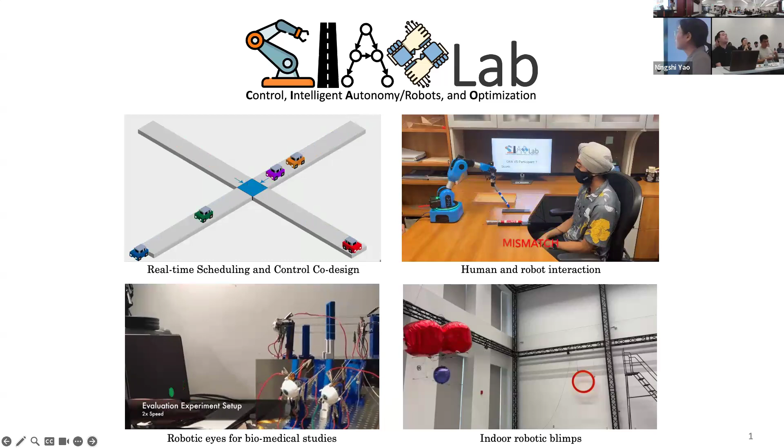We use control theory and dynamic systems to study how humans and robots interact with each other. For this specific scenario, we're trying to study how human and robot mutually adapt to each other. Using control theory, we want to study under what conditions we will have a limit cycle. So I try to adapt, you also try to adapt, and we cannot converge. So that's another interest.

And this bottom left is a very exciting project. We recently got an NIH grant, which will allow us to build an artificial muscle-driven robotic eye to help us study human ocular motion and strabismus, a specific cross-eye disease that's affecting more than 10 million Americans. Actually, it's a big number.

And last but not least is today's show. I'm going to focus on the indoor robotic blimps, how we design and deploy them, and also design the corresponding control to achieve autonomy. This is my student's blimp in our lab, trying to capture and score autonomously. It scored out of multiple failures; I picked the one that's successful. Okay, it's a joke. We actually succeed a lot of times.

To give you a quick introduction about airships: airships or blimps started outdoors. This picture shows the 1930s, when they launched the first outdoor airship that achieved a cross-Atlantic mission, flying across the Atlantic Ocean. But in the end they abandoned this as air transportation because they used hydrogen at that time, and it eventually blew up and caused a tragic accident. Later, helium was found as a much safer lighter-than-air gas. So now blimps use helium as the lifting gas.

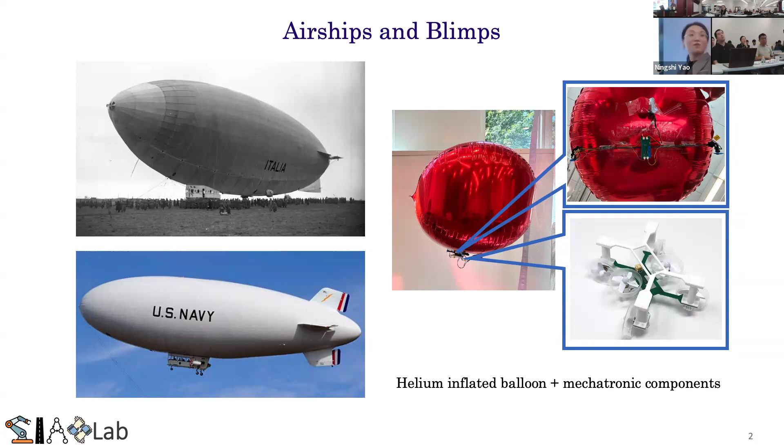And also you can be creative. You can design your own gondola, which is a mechatronic part attached beneath it. You can have different design. And then generally, if we have a helium inflated balloon plus some mechatronic component, we can actually easily make a blimp. All right, so then you may ask why we need a blimp, especially miniature indoor blimp, right? So I will actually try to sell this idea very quickly.

So the benefit of using indoor robotic blimp is, first of all, it's small in its size. And the major benefit it gives us compared to multi-copter drones or the fixed wing airplane is that because helium provides the main lift, you don't need to waste the battery power to just fly, right? So all the power is used to move the blimp around. So for one blimp, if you use a decent size of battery, we can achieve up to 3 hours flight time per battery charge, right?

But if you use indoor drones, maybe 15 to 20 minutes, the bigger outdoor drones up to 1 hour, that's the maximum, right? So that's definitely the first benefit, if we think about indoor tasks that need long duration. For example, I do human robot interaction experiments. So if I need to collect continuous human data, the blimp is actually an ideal platform. Without any interruption, I can collect the human data.

Another obvious advantage is that it's more friendly to humans, right? So I will show you this video. So imagine a drone doing this to you, right? Even if it's small, even if it's protected, I won't allow them to do this to me. But yeah, it's hilarious. When we shot this video, the girl actually enjoyed it.

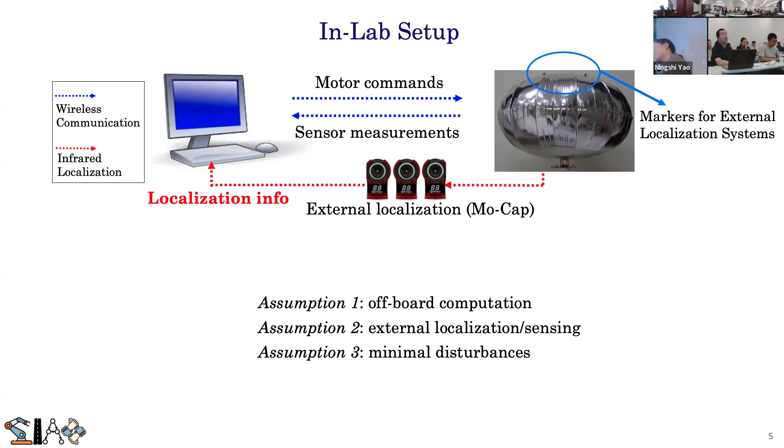But if we do this indoors, then we can fully use the blimp dynamics and try to design a good controller. This slide shows the general 6 degree of freedom dynamics, and this is the dynamic equation. Position and pose plus their corresponding velocities give 12 state variables. And roughly speaking, these two equations are able to model the full dynamics of the blimp, right? So it's very powerful. It's able to describe what the blimp does.

But actually in reality, if we want to use those equations, the challenge is that we need to identify all the parameters, which is very hard to do. Another problem is that the blimp will also have this external disturbance, which I denote as capital F and capital M. Because of the environment, sometimes capital F and capital M, the external force and moment, will be the dominant force, which makes the control very hard to do.

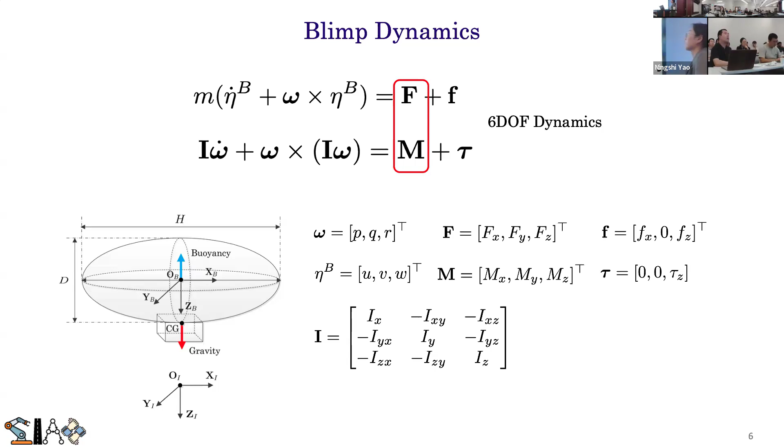So to make the design of the controller easier, the first step we do is use three motion primitives. Because of how we designed the gondola, the blimp is constrained to only have these three motions: forward and backward, up and down, and also changing the heading direction.

Given those motion primitives, we assume those motions are decoupled, which is not true. We will see this in the next slide; they are actually coupled. For example, forward and yaw are definitely coupled together. But if we assume they are decoupled, then the nonlinear full dynamics can be simplified to just second order dynamics, and they are separated. Because this is second order, if for now we ignore the external force, we can easily use a PID controller to stabilize the system and control it to a reference.

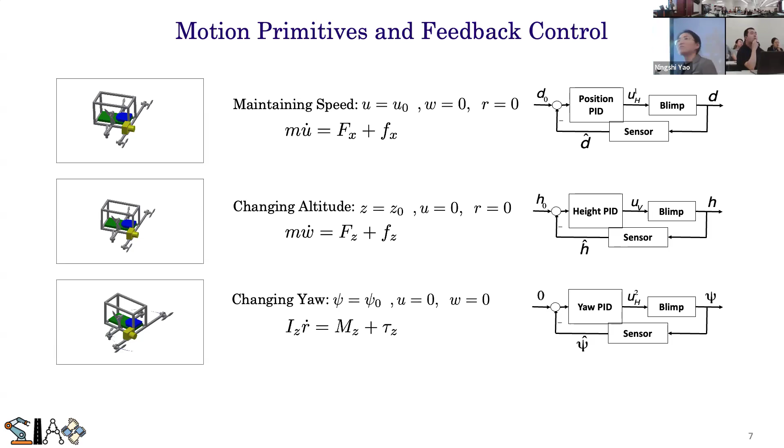Okay, so this is now our simplified linear model. Easy enough, because then it's just mass, which can be directly measured. Then we can go ahead and do the system identification. I'm showing 3 transfer functions. The first transfer function shows the forward backward motion. It was supposed to be second order, but after we get the output response to a step input, we can only identify this as fourth order. That's because of the coupling of this motion with other motion.

The second one is the changing of altitude, so up and down. We can see we actually have 2 different dynamics. This is because the efficiency of moving up and moving down are different, because you have a big chunk of envelope blocking the airflow. So flying down is harder than flying up, because the wind jet is blocked mainly by the envelope. We deal with this by separating this into 2 different transfer functions.

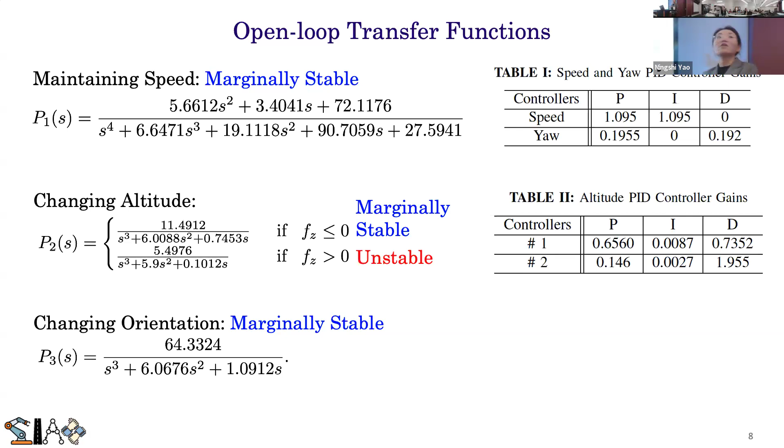The last one is changing the heading angle. Based on these identified transfer functions, they are either marginally stable or unstable, so we need a controller to stabilize them. As a very trivial first step, we just grab each transfer function and design the PID controller correspondingly. So let's see how it works.

The first one is we test the altitude controller in the lab. We have a reference height, and it's able to quickly converge to that. And if you add a big disturbance, it can also come back to the reference height. So that means the height controller sort of works. Sorry, I fast forwarded this. Let me show you the yaw controller.

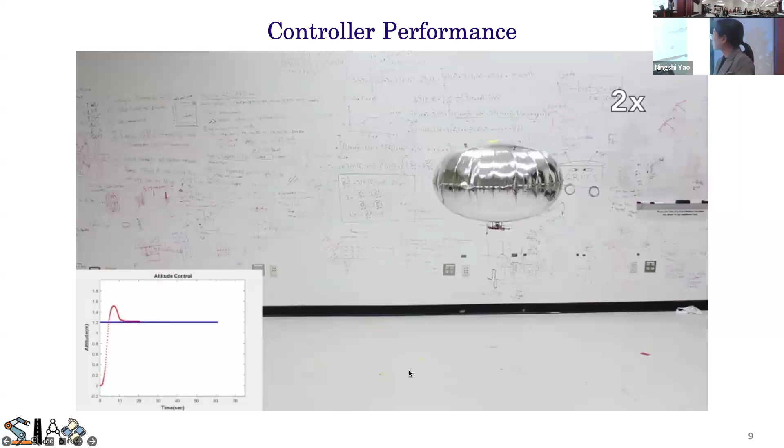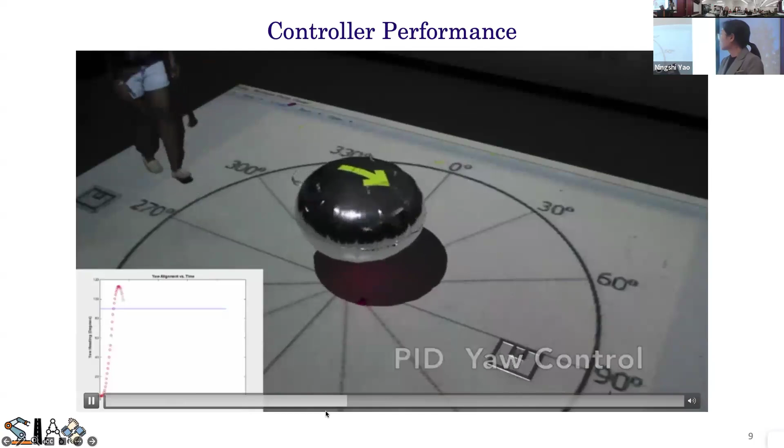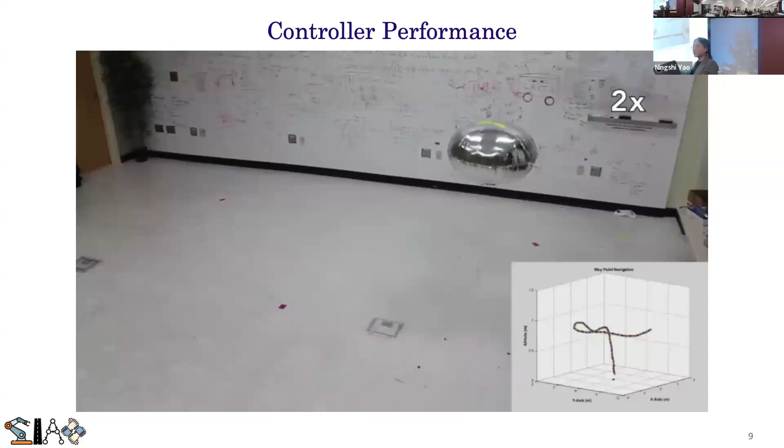This is controlling the heading angle. The blimp was supposed to look at 90°, which is projected here, and it can converge to this 90° reference. Combining the altitude, forward, and yaw controllers together, we can achieve a waypoint controller. We assign a bunch of waypoints, the 4 corners of this space, and the blimp can follow this trajectory, visit the 4 corners and loop around. So this is the basic functionality.

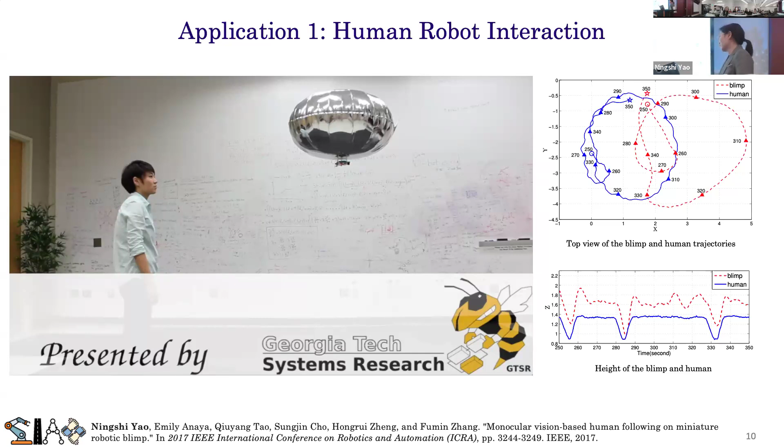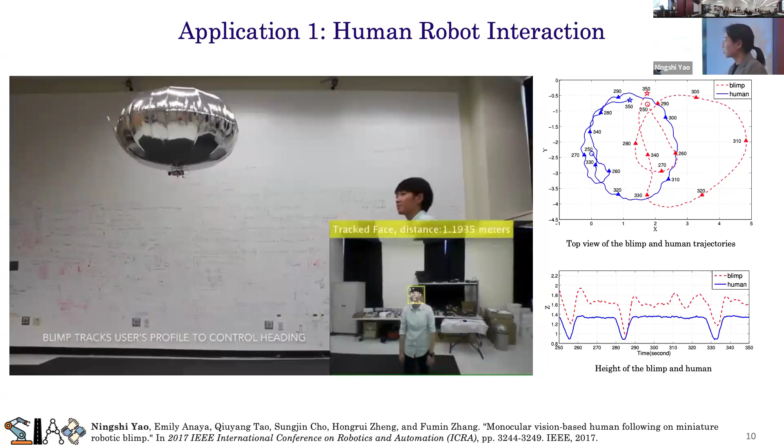With this, we can already start our first application. This is truly my work, from a long time ago when I still had short hair. We used this identified model and the PID controller to do a quick human robot interaction demonstration, which is used in our demo today. It tries to identify a human face, and as I walk around, it tries to lock the detected face at the center of the image frame. So if I walk around, it will try to follow me using the yaw controller.

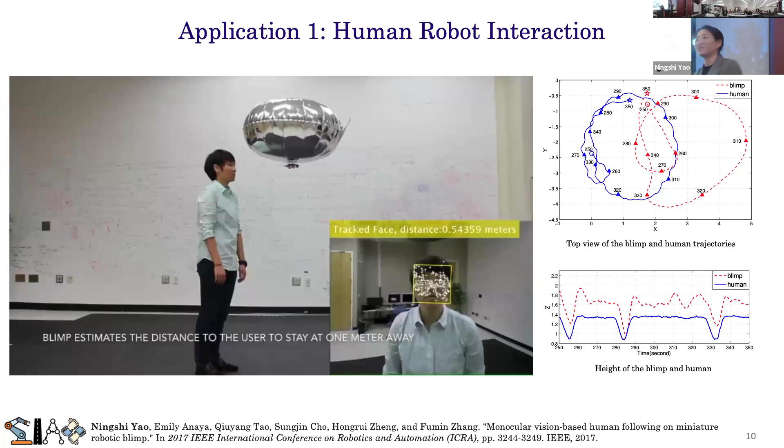And if I kneel down, so I'm about to kneel down, it's able to adjust the height. But if I stand up, it will actually stand up. If I suddenly step too close to it, it will try to maintain a polite distance from the human, right? And those are the collected data from our object track system, just to use this as a ground truth, right? And then build on top of that, I want more like a bi-directional interaction.

So what we do is instead of just detecting face, we also created 2 motions, like a hand gesture, which is horizontal motion, just wave your hand horizontally or vertically, right? And it's enabled by just an SSD, which is a deep neural network to do object detection. And then Blimp is able to recognize it. If we wave this horizontally, it's going to spin.

And also we put a small LED light to say, oh, I got your point, right? So I'm about to do the corresponding action. So then we use this to actually collect the human data to study whether there's a bi-directional feedback, so having this small LED will help with the interaction or not. So this is some experiment we did. Okay, so simple and efficient, right?

So the PID controller. But then if I want more precise control, here is a problem. If you watch this video, you probably caught it when we were doing the demo previously, so we can rewatch this again. If he starts, you see this big pitch oscillation, right? That's because at the beginning, I'm trying to move from the static stage to suddenly needing to fly fast. So this is actually because we put everything heavy beneath, right?

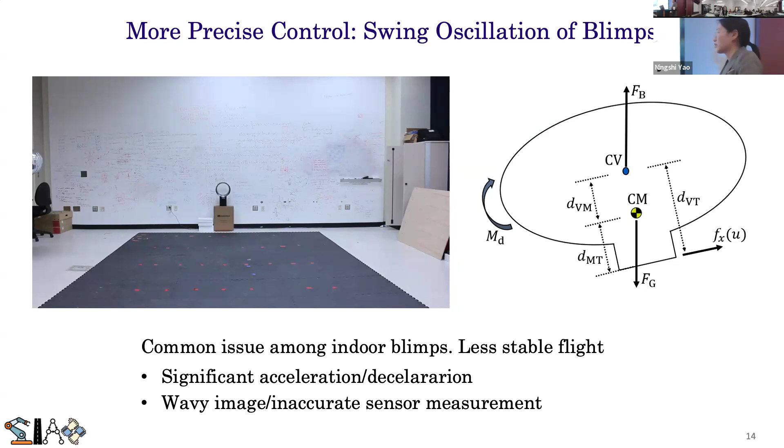And also this pitch oscillation can also be caused by the wavy image. So sometimes the image measurement is kind of noisy, so that it actually messes up the measurement, or sometimes it's directly incorrect measurement. So it will cause this swing oscillation, right? So then we also want to design a controller to see whether we can reduce this swing oscillation, because this makes the flight less stable.

Okay, so this is a lot of equations. So I will quickly explain it. So what we do is we try to look into the state space model, just modeling this 1D swing oscillation, pitch oscillation, but it's still coupled with the translational oscillation. So it actually depends on how fast you are trying to fly forward, right? Which makes sense. So then in this first equation, the blue variable is denoting the speed, the translational speed.

Okay, and then the strategy we use to solve this problem is the inner and outer loop control strategy, which is also a very standard way of doing control, right? Because the pitching is a faster dynamics, and speed is a slower dynamics, we try to use the inner loop to damp down the pitching, while the outer loop tries to make it constant speed.

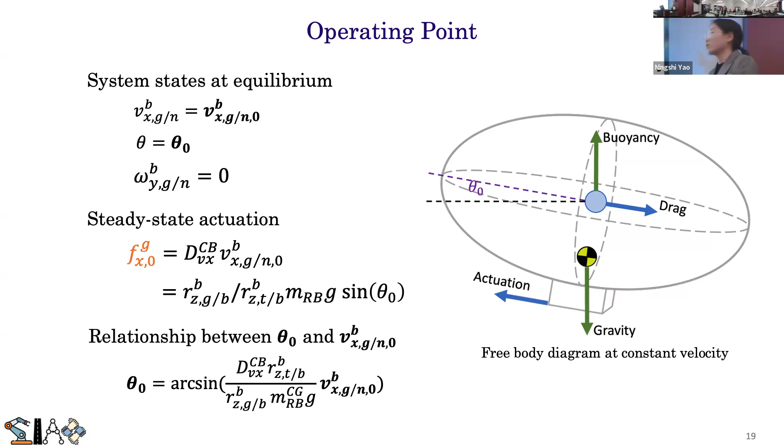So then corresponding to each constant velocity, there is a constant force equilibrium, there is another constant pitch angle, right? So then this is the inner and outer loop structure. The inner loop controller will assume we have a constant speed, and then try to design a controller. So we do actually a feedforward path by using this equation to compute what is the corresponding force corresponding to this reference pitch angle, and then feed this to the plant, right? Then we also add a feedback path to compensate any disturbance, right?

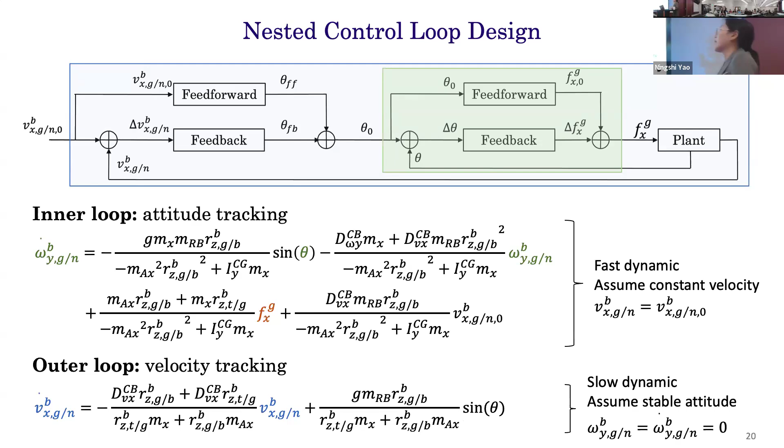So then this inner loop will make sure, if I have a reference or operation pitch angle, it's able to take care of that. So you can fly stably, maintain this pitch angle. And then the outer loop is going to make sure we have a constant forward speed, because each forward speed will correspond to one pitch angle. Okay, and this is the structure we use. And then we can see how the result will be.

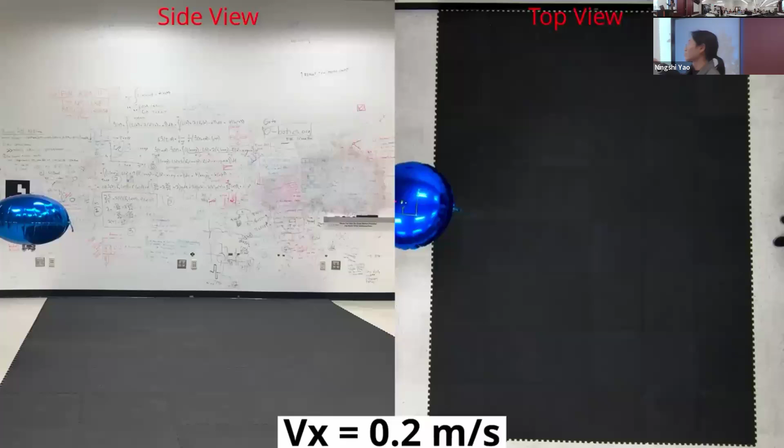So now it's actually more stable, and wait and see. This is my colleague Qiuyang. He actually tried to introduce a disturbance, and then you can quickly damp the oscillation, right? And also it's very constant flight, right? So it's slow, but just steady. Okay.

So an application of this is that now we can use the blimp to mimic an underwater vehicle, right? Because it has similar dynamics, it can be easily blown away by wind, the same way the ocean current can blow away an underwater robot, right? So we use this as an experimental emulation platform to allow us to test the algorithm before we actually launch an underwater vehicle in the ocean, right? Because if your software does not work, that's a waste of time and effort.

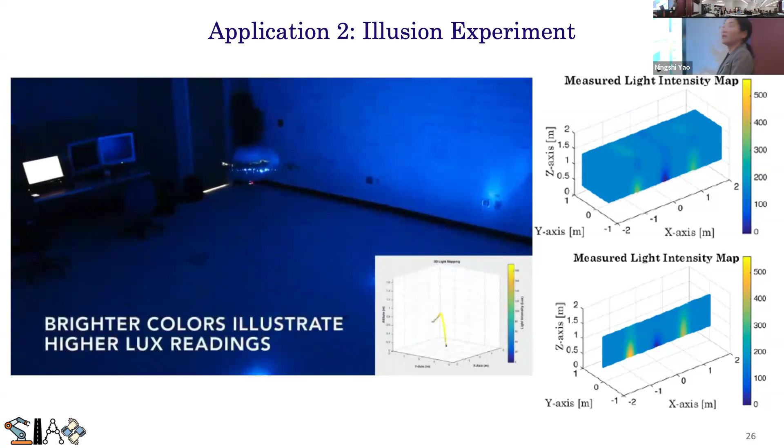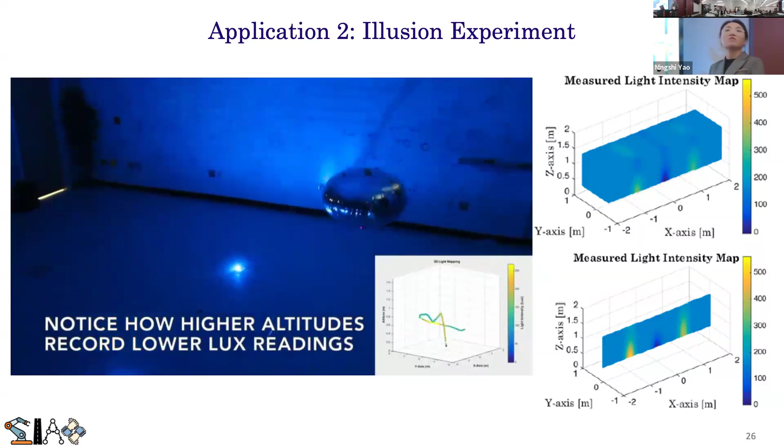So this video is showing our lab at Georgia Tech, where we can put the light in, create a light field, and then we put the light sensor on the blimp. So we can collect the intensity of the light at each point, right? And the algorithm my colleague was testing at that time uses those sparse measurements of light. He used one specific method called the kriging algorithm that allows him to reconstruct the whole light field, right? So you can see this is the center of the light, which matches the location of the light we put here.

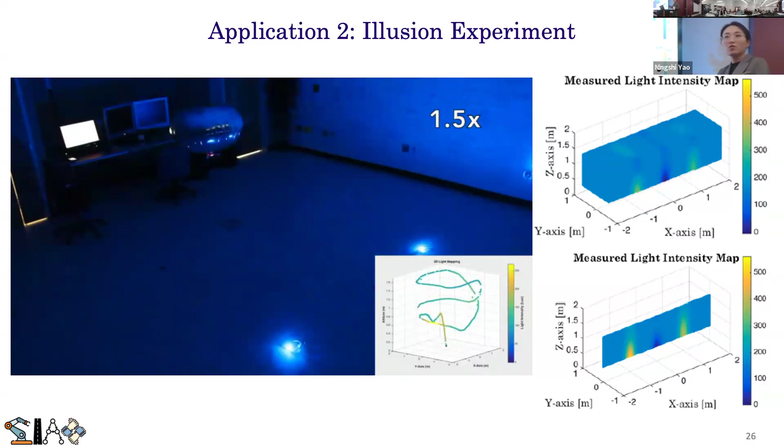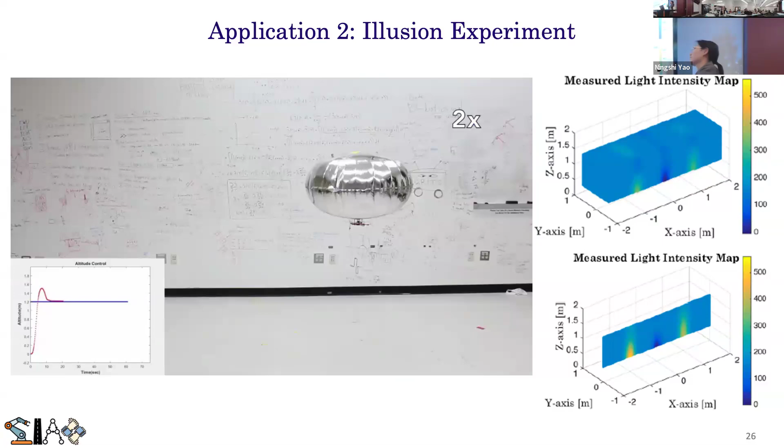And this is the reconstructed light field, right? So you can think about this as an underwater vehicle going into the ocean, taking measurements of maybe pollution or chemical leaking, and then we're trying to remap what the field looks like. Okay, so far I introduced the in-lab application, right? So the next part is, what if we want to move it out of the lab?

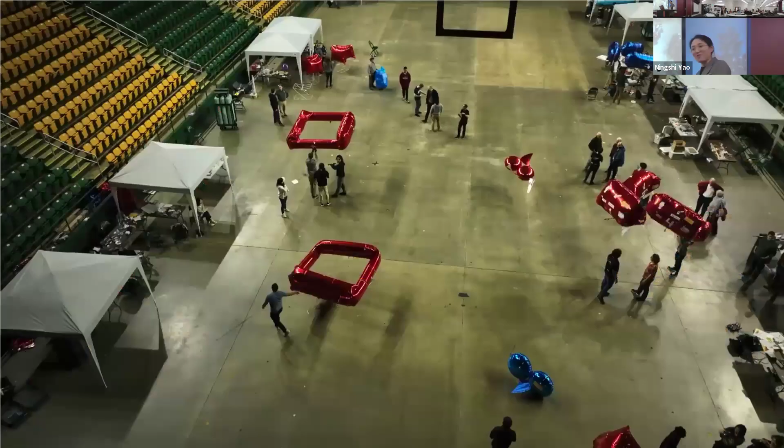Okay, and this video is showing a blimp competition. I sped this up a lot, right? So this is out of lab in an adversarial scenario, and everything needs to be on board. This is played at GMU, and you also see the flappy here, right? So this competition George Mason has been running for more than 6 years, and I have joined this competition for more than 3 years. It's called the Defend the Republic blimp competition.

So you can think about this as a 3D version of air soccer, or a robotic version of Quidditch, right? We have 3 goals on one side, 3 goals on the other side, blue team versus red team, right? And those colorful green and purple balls are just like the soccer ball. The blimps need to autonomously capture them and also score them, right? The competition is played by a lot of universities, right? So all those are the list.

So the rule of the competition is each game is 60 minutes. It's kind of long. That's like 60 minutes, so 30 minutes each half. During the halftime we need to swap sides, so then it's fair. So you attack this side for the first half, then the next half you attack this side. And also you defend your side, exactly like soccer, right?

So then for every 5 minutes, only the first 30 seconds allow manual control. And also only one blimp can be controlled. All the others still need to be running autonomously. And then the rest of the 4 and a half minutes, it needs to be fully autonomous, right? People just leave the field, hands off the controller, just let the blimp play.

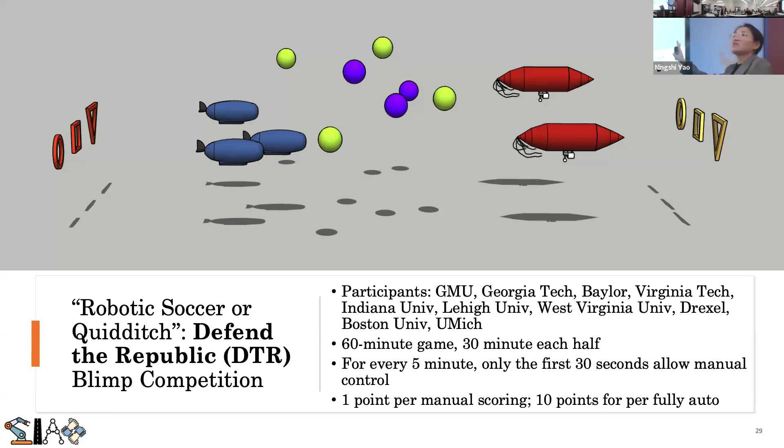And then we also try to encourage the fully autonomous mode. So how we win the competition is 1 point per manual score, 10 points for fully autonomous, right? So fully autonomous is actually weighted a lot more. Okay, and then this competition is sponsored by the Office of Naval Research.

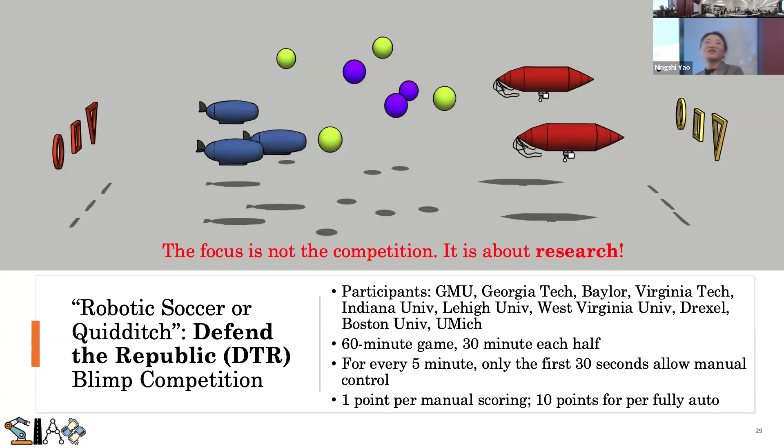And I just want to emphasize, this whole thing is not about competition. It's about research, right? We're just using this platform as our annual review meeting. We want to actually test our development in the real field, instead of just having fun in a competition. It's not that fun. It's very stressful. But this is about research.

So what research question are we trying to address? It's actually exactly relaxing all the assumptions I had previously. Because it's out in the field, the requirement is no off-board computation. Everything needs to be on board. And also definitely no external localization, right? No mocap system. It's in our basketball arena. And also there are going to be wind gusts and the opponent team's defense actions, bumping, adversaries, right? So how are we able to do that?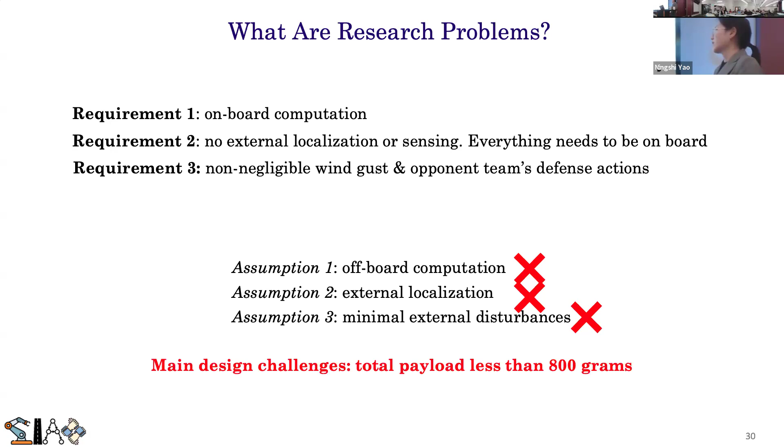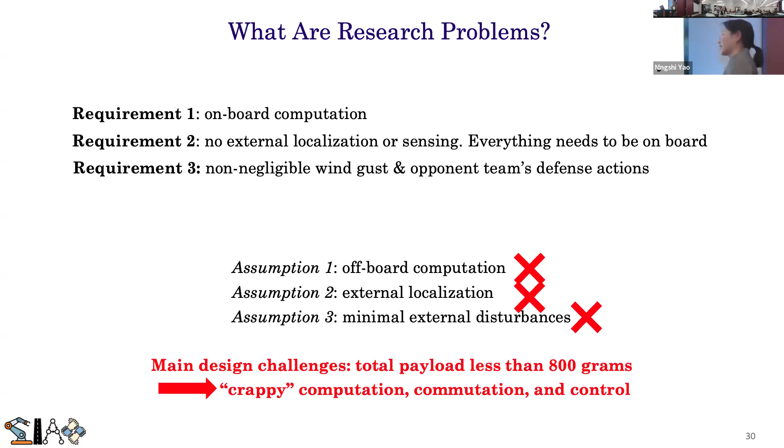And also we have again a design constraint, which is the total payload. Everything on board needs to be less than 800 grams, which is kind of challenging if you consider the battery, everything. So this means crappy computation, crappy communication, and maybe crappy control, right? You cannot have perfect anything. You have crappy everything, because you eventually want it to fly.

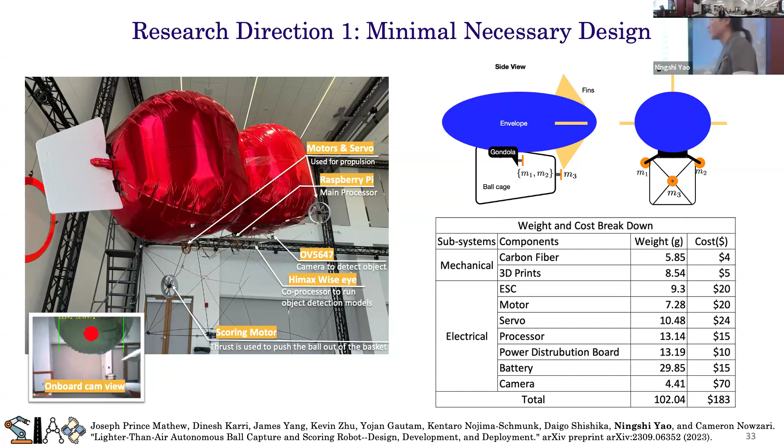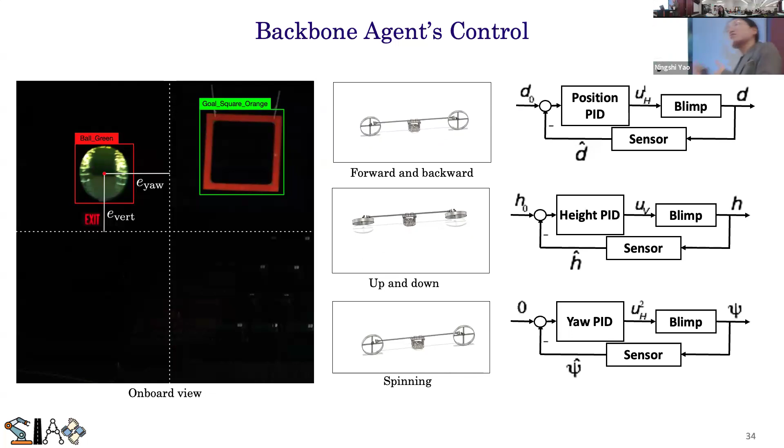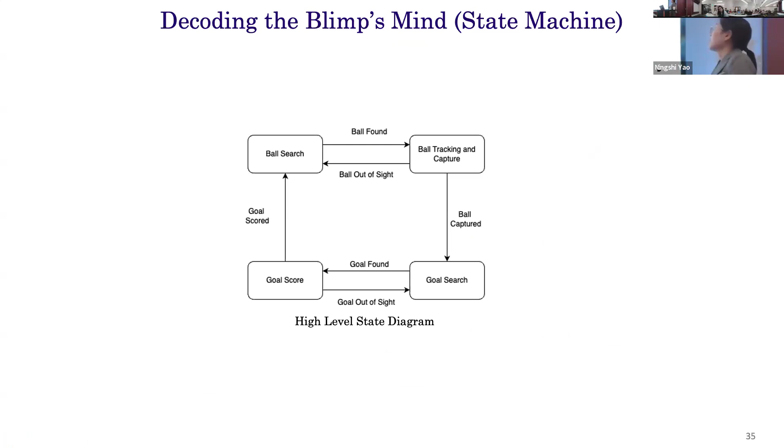And then also the software is minimal but necessary, right? So we have 4 stages. The first stage at the beginning, if I don't see anything, I'm just going to do ball searching, because the first step is you need to capture a ball, right? The ball searching, and then if I detect the ball. And also the challenge is that there's no direct localization. So during searching our solution is that we use the goal as a reference, right? And also we put a barometer on board, which is very light and cheap, to measure the altitude.

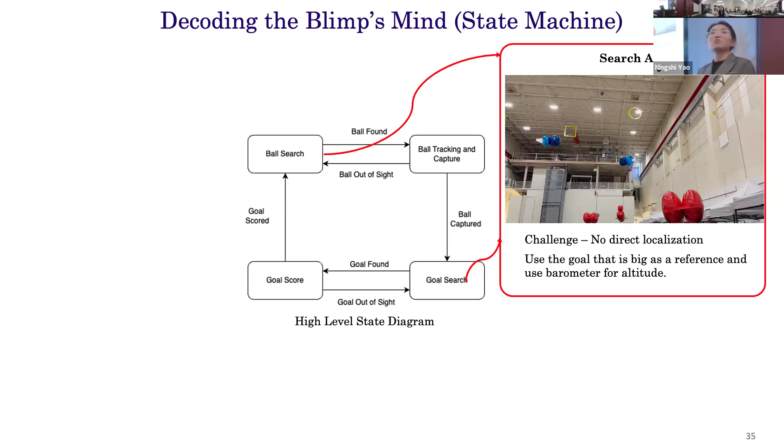Okay, and then if we get the ball, we capture the ball, move forward, and then if we capture a ball, try to search for the goal and then score, right? So this is a very simple, but also efficient state machine logic.

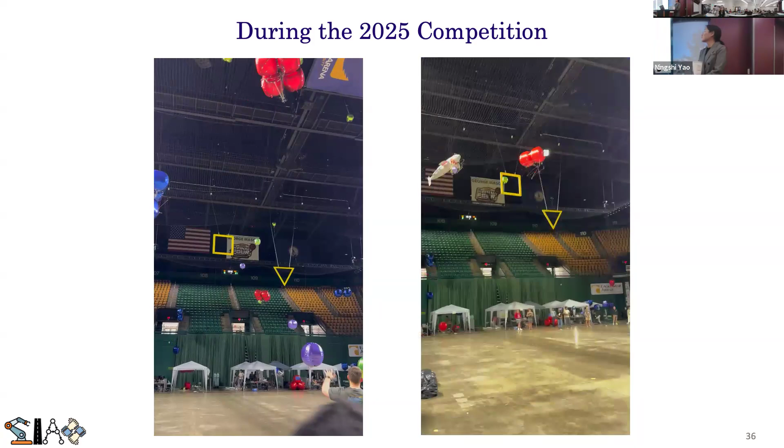Okay, so then let's see how we do. You can hear me yelling in the background because I want to show you the excitement, right? So this guy is trying to score now, fully autonomously. Yeah, we got 1 in. And then another one is actually we need to swap color. So that's another constraint we have on the competition. So one day you play blue team, one day you play red team, right? So then we need to make sure our design is also modular.

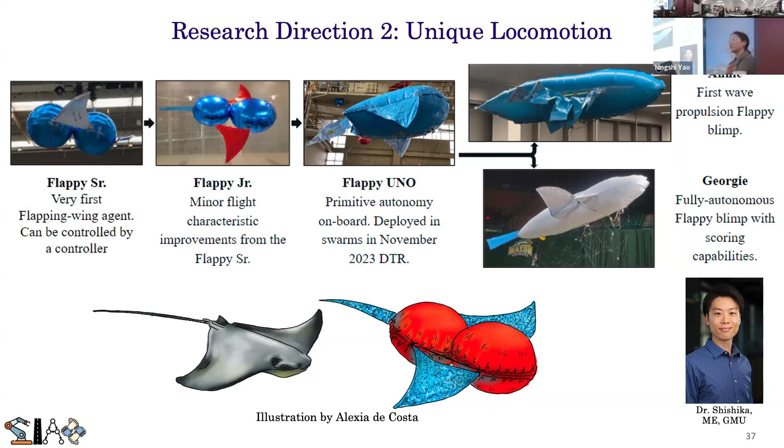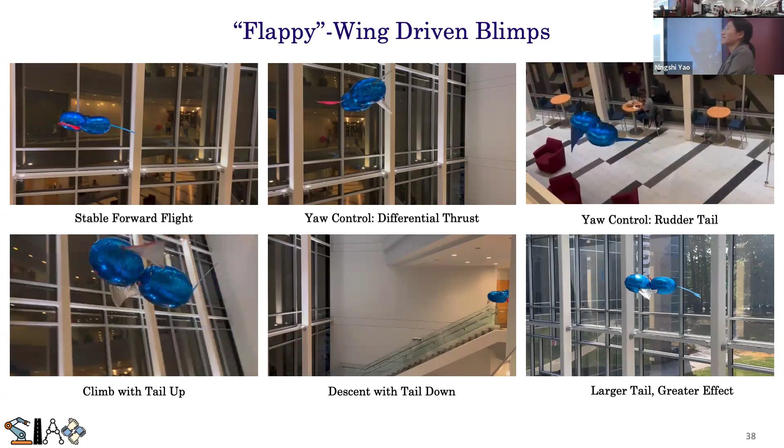Okay. So then again, a little bit more detail about the flappy agent you see. So it has two wings, right? So this is the only actuation that allows you to fly forward. But the good thing about blimps is that they can glide, right? So it has this nice, elegant streaming behavior, so you can glide. And also, if we want to control yaw, you just have one side flapping, right? The other side stops, and this is how we are able to fly. And then also, if we want to have a sharper turn, we can use the tail rudder to help us turn. All right, and then climbing up, yes, we can also use the same tail, but pitch up, right? So this will also allow us to pitch up and also pitch down.

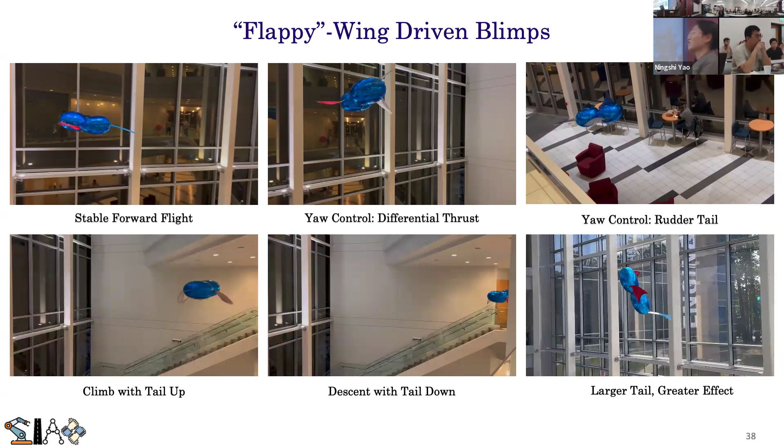The last thing I want to show is very cool. So if we have a bigger tail, actually we're able to do this trick. So you fly in a circle because the pitch angle is much sharper, right? So then we can do this. So this is cool.

Yeah. And also a little bit of a nice scientific result we find: we try to compare, so what's the difference between flapping wing and the propeller, right? So we find out the flapping wing is much more energy efficient. It's because the flap will allow you to glide for a long time, right? So the test we did is that we actually use a load cell, which is able to measure the thrust. And then to test the duration, we compare different shapes of wings and also the combinations, and compare this with different propeller to motor combinations.

So the test is that we use exactly the same battery, fully charged. We just let it fly as long as possible. So then we find out that the Flappy result is here, meaning that Flappy can only fly slower, right? So maximum speed is here, about 1 meter per second. Propeller can achieve much faster motion, but then the trade-off is actually it has less duration, right? So Flappy can actually outperform all the propellers duration-wise, right?

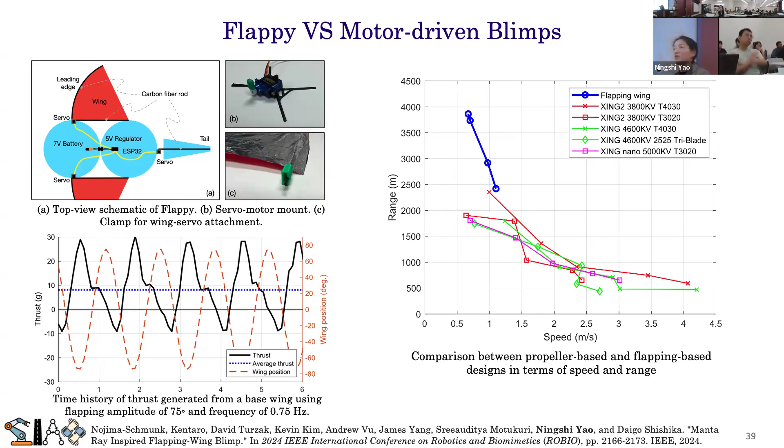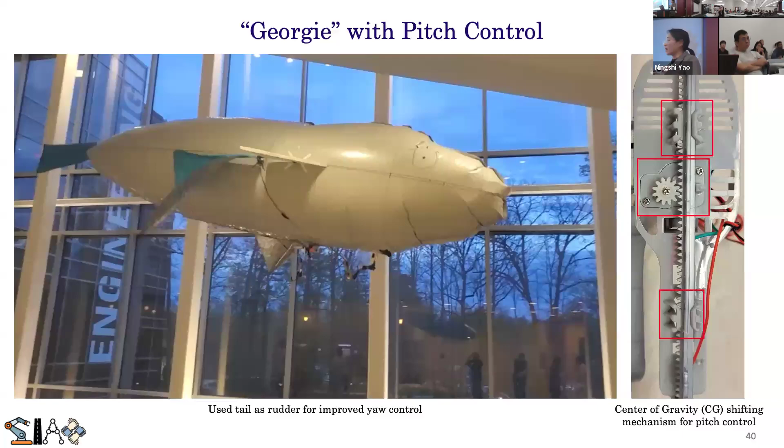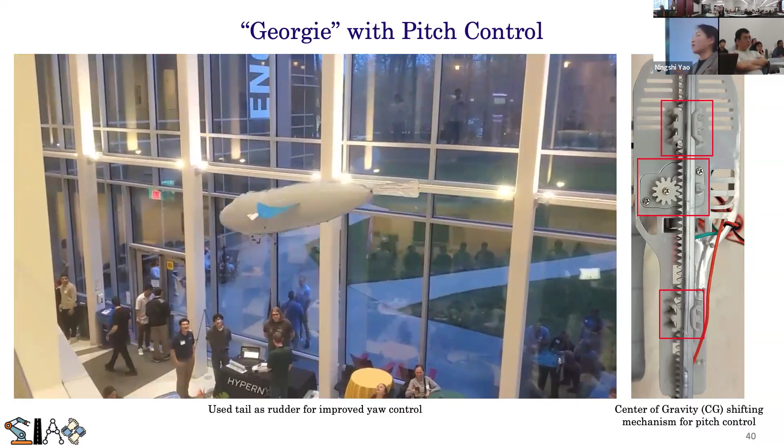So this is one of the nice benefits, and also the design and this result is in one of our conference papers published last year, right? And then later, Flappy is just for showcase, for demo. Later, we finally find out how we are able to achieve full autonomy for our agent, which is called Georgie. So Georgie is bigger. This envelope is customized by our own student because we want to have a bigger volume to carry a little bit more. Meanwhile, we still want to make it aerodynamically efficient. So our student actually handmade this whole envelope.

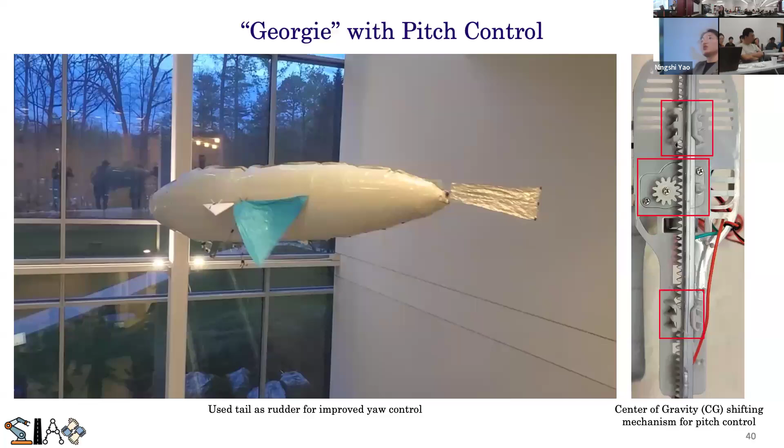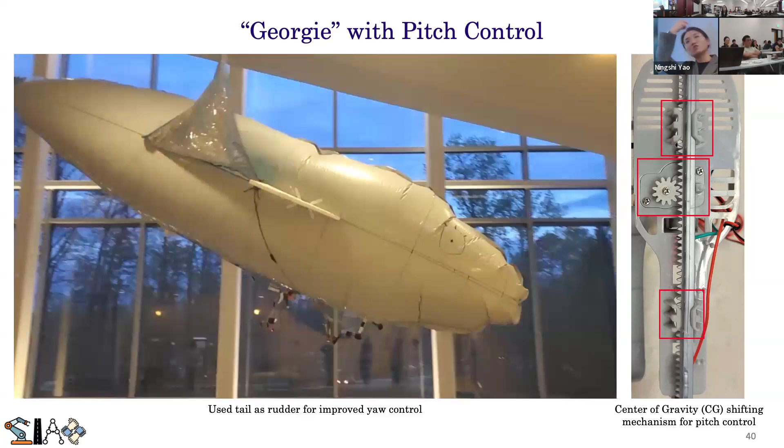So the trick Georgie can do is, because now it's big, only having the tail won't be enough to change the pitch angle. So what we do is at the belly, beneath it, we actually put a very long rail and then use this gear system to move the CG, so move the heaviest part, which is a battery, from the head to the tail, right? So by moving the battery around, this is how we are able to change the CG. So this is very forward, so then the blimp is able to pitch down. And if we move it to the tail, it's able to pitch up, right? And also using what we have on board, because I don't want to introduce any more weight or any more actuation. So this is kind of a smart design we do.

Okay, and then this video is so cool. It's because this is the only penalty shooting round we ever have in our blimp competition. It's because some other team violated some rules against Georgie. So then Georgie has 5 minutes by itself, and then tries to score as much as it can, fully autonomously. Okay, so then let's see one round. So when we shoot the video, it's already captured 2 balls autonomously, and then we can see it glides through.

Let's go. And this is the yelling by my colleague, Dr. Daigo Shishika, because, yeah.

And during that round, we scored 3 fully autonomous goals. So we got 30 points out of the penalty shooting round. Yeah, so that's good enough, right? And this is actually a joint work between 2 ME students and also my student Youjang. So I really like this because this truly shows a joint team effort. Youjang helped a lot with the autonomy and also software design. Meanwhile, the 2 ME students worked a lot on the mechanical design.

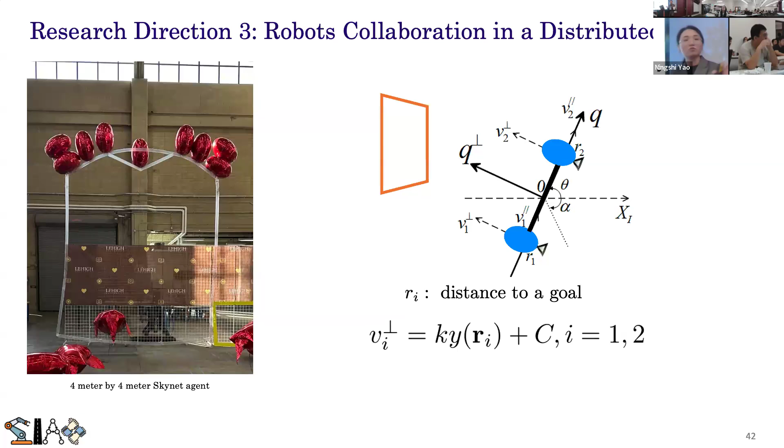So if my measurement is small, the forward speed is just proportional to your current measurement, okay? So what we do is, if my target is a goal and I'm closer, then I will slow down. If it's further away, I will speed up to try to catch up. So eventually I'm able to converge to the target.

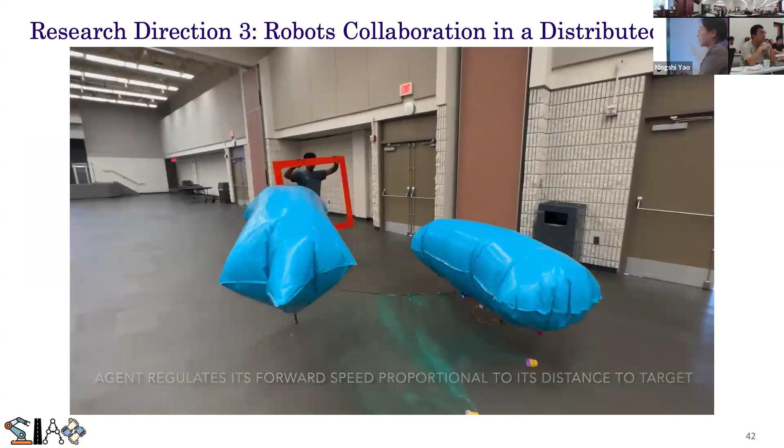So then let's just see how it will work out. These two backbone agents, our main scoring agents, are trying to estimate distance based on the camera measurement, right? So if it's bigger, I'm closer, so I slow down proportionally. If I'm further away, I try to catch up faster. So you can see the tracking behavior works very well.

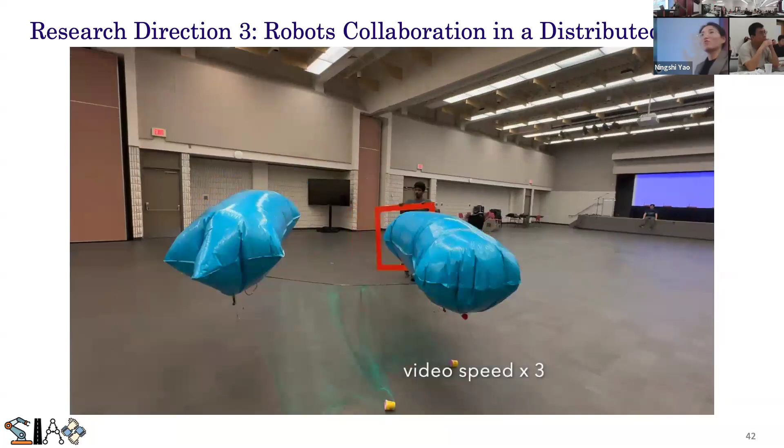They don't communicate. Even though we put a rod in here, we just want to carry a net, right? I will tell you what the net is going to be used for. So they just try to regulate this forward speed and follow, tracking really nicely.

Okay, and how we are going to use this in the competition is, like I said, I put this rod and also the net beneath. So if I don't see any opponent agent, it will just try to fly forward. Once it sees a target, I can use what I just showed, the tracking, to autonomously and collaboratively approach the goal.

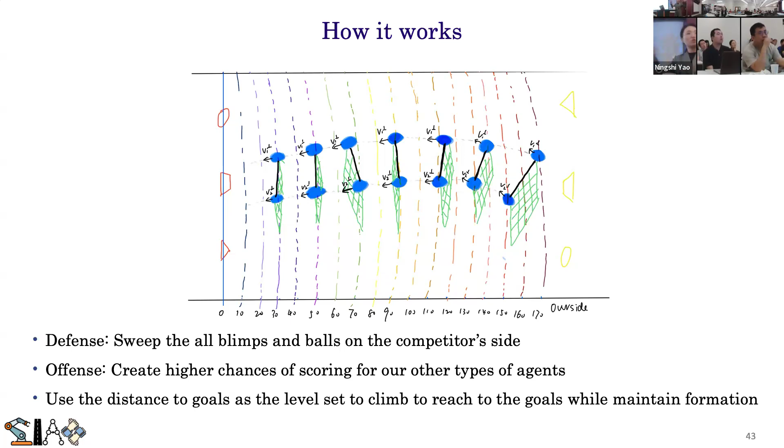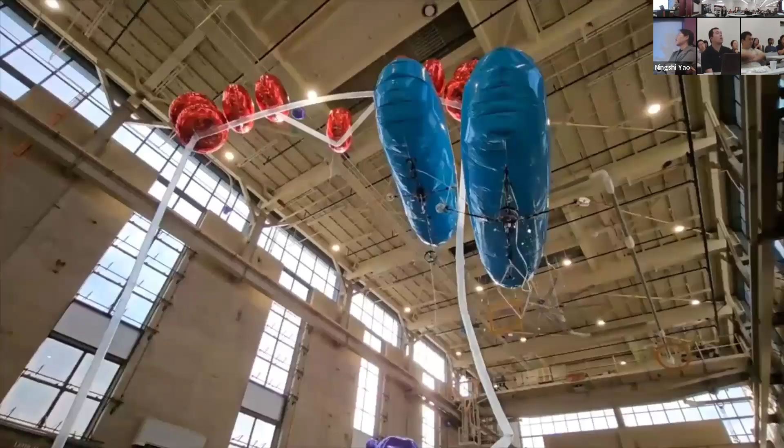All right, and for the sake of time, all the theory is analyzed, right? So it's guaranteed to converge as a source seeking algorithm. Due to the sake of time, I will skip this.

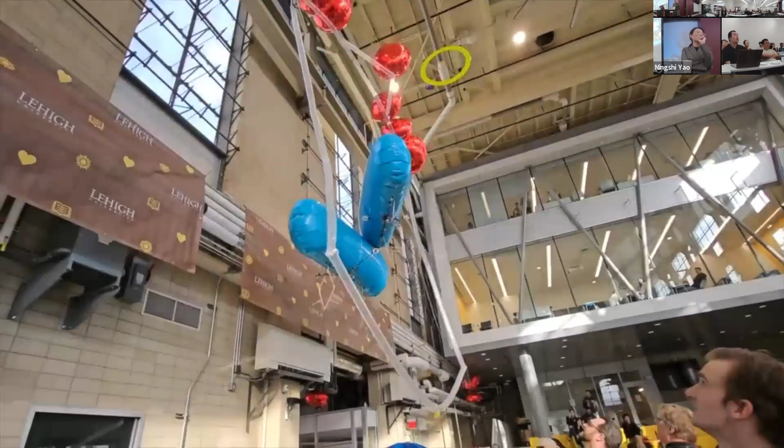And this is our successful defense. So we are the red team. The blue team is our opponent, right? Using this strategy, we take the target to be the blue agent, the color of the opponent, and they are able to capture both of them and smash them on the wall. And we leave them there for one autonomous mode, so 5 minutes. We are nice friends, so we let them down.

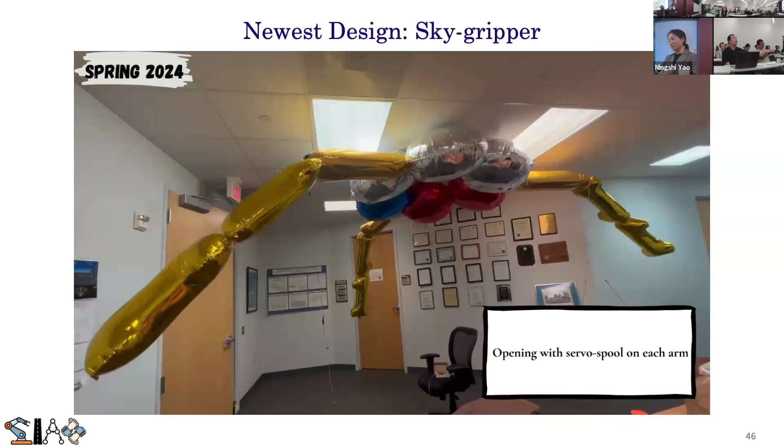Okay, and then just to show you something else, why just use a vertical net, right? I can also use a gripper. This is work done by my senior design team. I gave them this result: I don't want this sweeping behavior, I want a giant gripper, right? So they were able to come up with this.

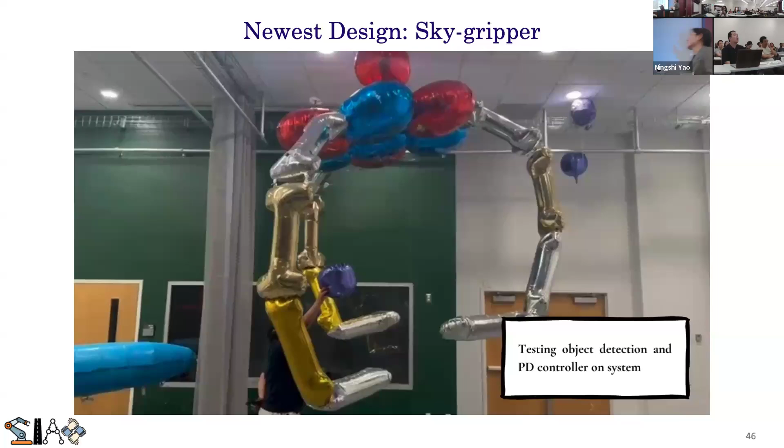The legs of the gripper are actually just pulled by string. If they release the string, the fingers naturally get forced down by gravity, right? Again, we try to follow the philosophy of minimal but necessary. So using gravity, you can force down. And they use a PD controller. They put a down-looking camera here, to seek the opponent agent again. If they see an opponent agent, they will try to fly down and grab it, right?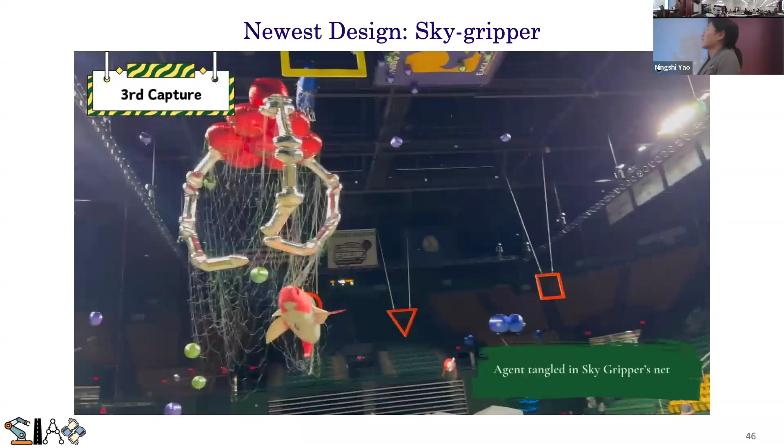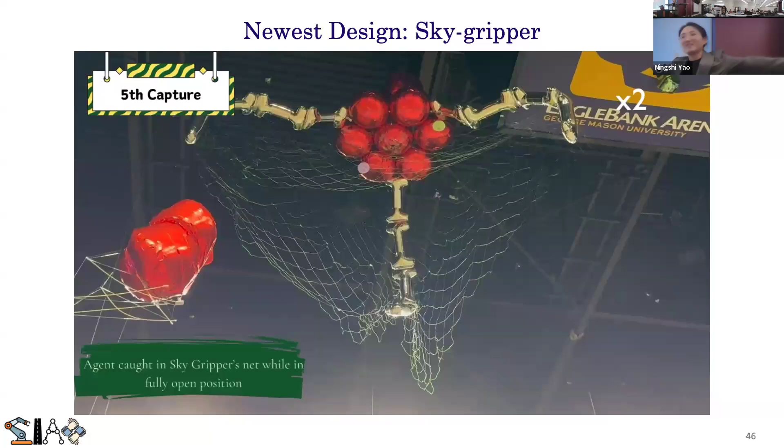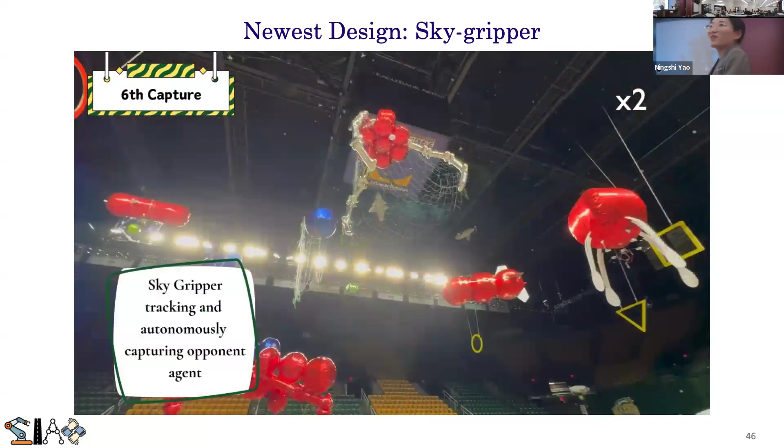Sometimes it backfired on us and captured our flappy. But we do have some successful defense during the competition, right? The flappy is very big, so you can capture it. And I think one of the agents actually flew down. We also put two baits, a purple LED light and a green LED light, just to trick other agents to fly in thinking this is a goal. Yeah, so it's able to capture this blue guy, grab it and keep it there, right? So this is fun.

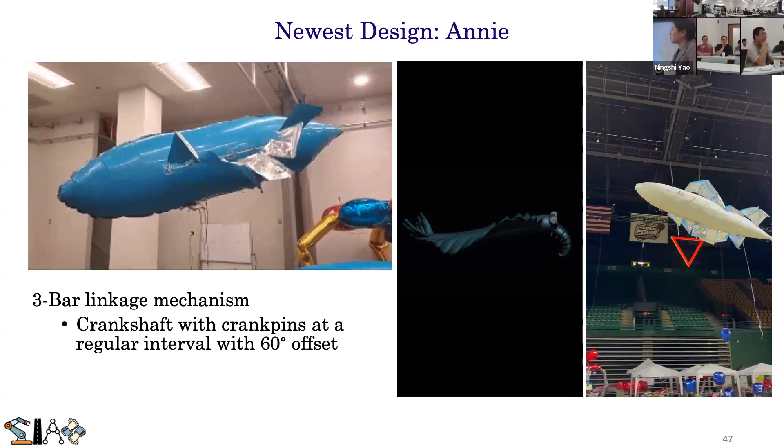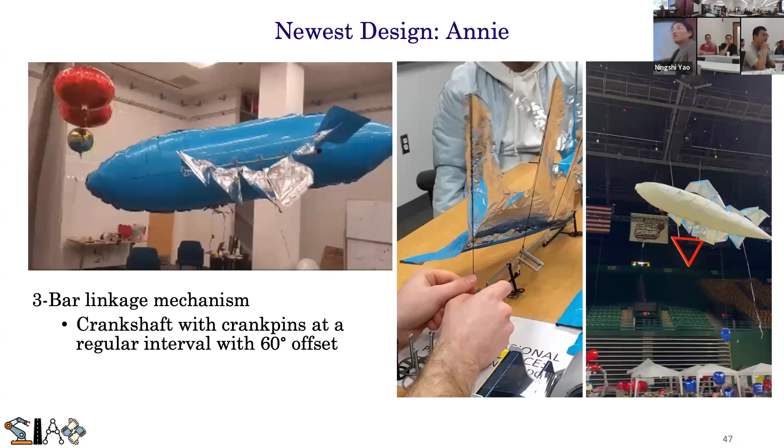So the last fun project, which is also a senior design, right? We want to extend the flappy using a linkage mechanism. Our ME team designed a phase difference of 60 degrees between each linkage. So by using just one motor, it's able to generate this wavy behavior, right? And we call this Annie.

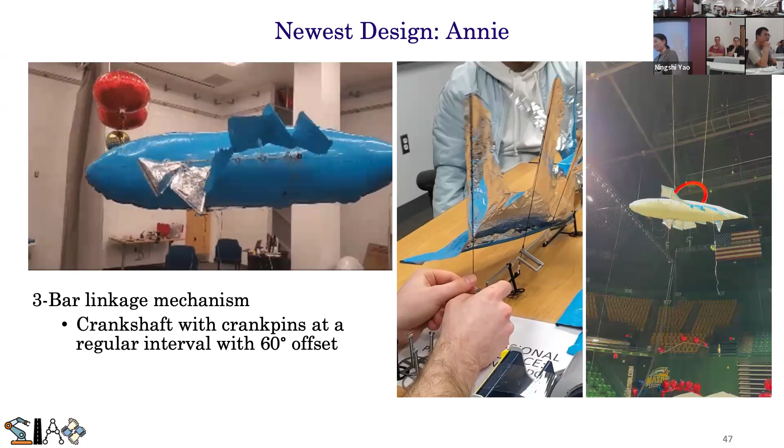So this is how Annie is able to fly during the competition, right? It's a good thing to see. Currently it's useless, so it's eye candy to attract all of us. Okay, so then I'm going to skip this part.

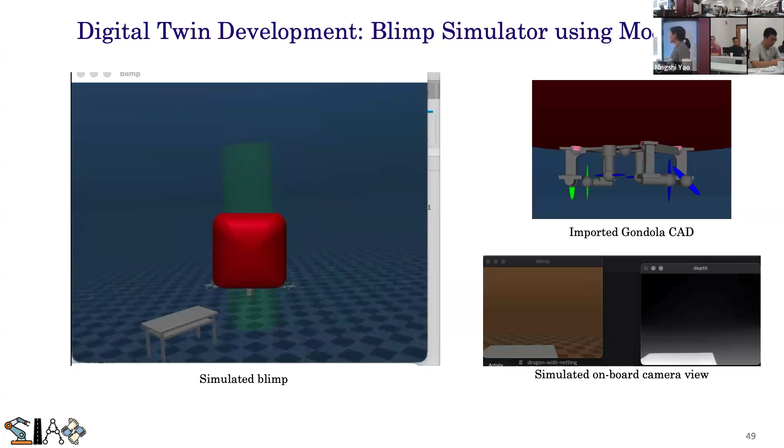And also, for more general applications, we try to create a digital twin to enable something like reinforcement learning. So this is the digital twin. We developed this in MuJoCo. With this, we can directly import our gondola CAD design inside of it, and we can also take the onboard camera.

So with the digital twin, now we can actually also use reinforcement learning or other learning methods to actually help us design the controller. Okay, so I will quickly do this. So because the Blimp is so safe, right? And also it's encouraging kids to actually participate.

So actually this summer, I took the effort to bring the Blimp competition to younger kids, right? So we actually launched the first robotic Blimp competition for middle and high school students. So it's aiming for grade 8 to grade 12. So this year is the first time we tried it. So we actually have more than 50 students participate. And we provide them with the basic Blimp kit.

And also one of the benefits is it's very low cost. So each kit will only cost $180. So the training we provide is 8 weeks of training. So we provide them a written document, the start guidance, and the basic kit. And also we organize several in-person tutorial sessions and 1 day of competition.

And then they can just build upon the basic kit, right? So even though they have no experience with programming, no experience with mechanical, they can still use just daily materials to test the Blimp, right? Design the capturing mechanism, use trash bags to design the wings to make it more aerodynamically efficient. And this is actually showing they use the capturing mechanism they designed to capture the game ball.

And they also learn how to do the basic programming, sometimes to change some program. Even though we actually provide the code for them, they are able to access and fine tune the controller parameters. And also they took the effort to rent a basketball court and do practice, right? So this really shows how motivated the students are and how engaged they are to do the competition well.

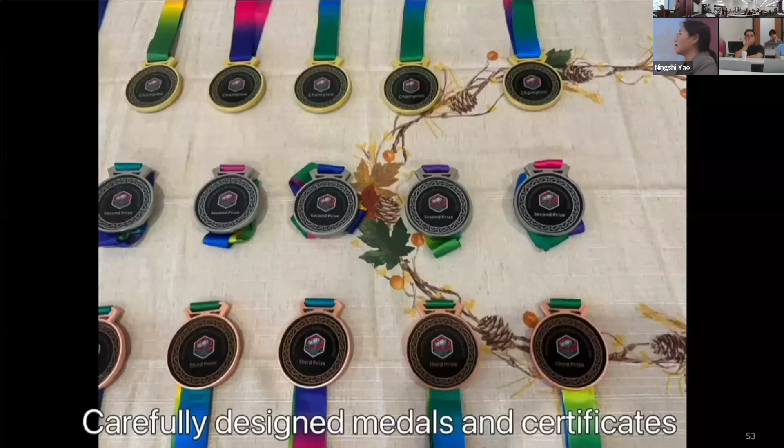And this is showing actually what happened on the competition day. So we have 1 full day of competition, and also to encourage them, certificates and medals, right? So during the competition, parents and students work really close together. And this is the same team. So they were actually able to do well. So they are the 3rd place out of 8 teams.

So we held this competition for the whole day, and also we were able to attract a lot of audience to attend, right? So this actually made me very happy, because this shows how an easy and accessible platform is able to encourage and promote STEAM education to younger kids, right? And the parents like it. So parents actually are able to see our effort.

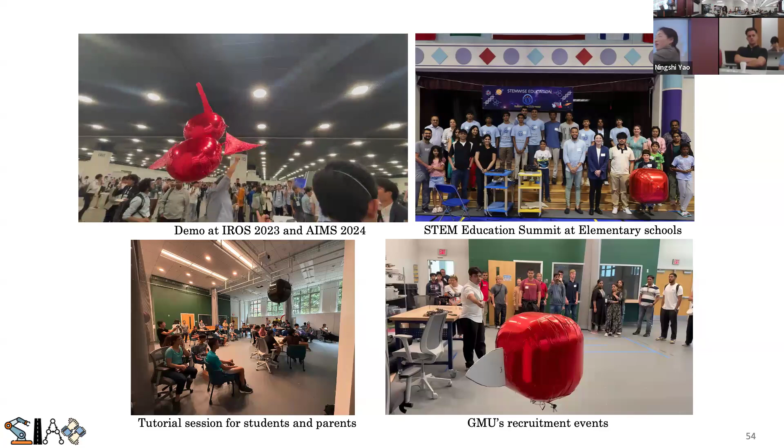And then this is other outreach. We do demos at IROS and also AIMS. And I also showcase this to elementary school students. And also this is the in-door tutorial. And also nowadays we are helping Mason to recruit undergraduate students.

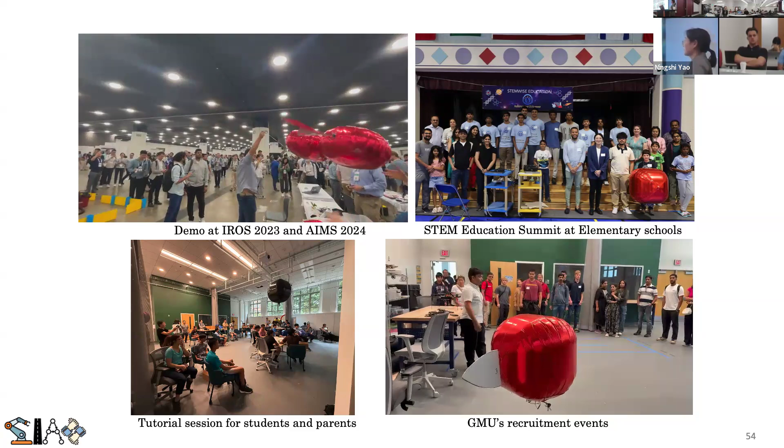Okay, so this is the last slide to actually wrap it up. And this is also the celebration. They like the live celebration. So let's rewatch this again. So this is also my senior design team. They just like this action. Okay, so I want to wrap up the blimp. As we know, it's safe, right?

So it's long duration. It's actually low cost as its benefit. But I also want to share some insight about what are the design challenges, and meanwhile the research opportunities. So definitely we need to improve on the modeling and the control, right? And also, with several teams participating, we can only design and model to what we have today, right? So there are more chances to design better control.

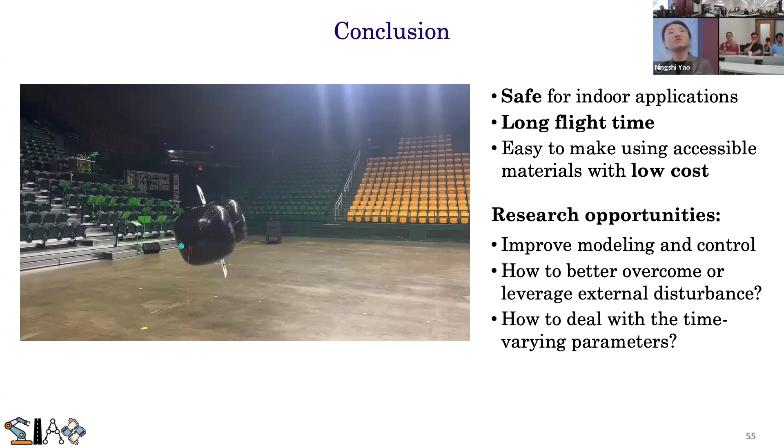And another important question is how to better overcome and leverage this external disturbance, right? The wind, are we able to leverage it instead of fighting against it? That's a big problem that I'm trying to work on. And also how to deal with time-varying parameters. Because with helium, if you have a temperature change, then buoyancy will dramatically change, right? So that's another problem. Can we actually adaptively design a control to compensate for that?

And last of all, remember everything needs to be on board. And if we want this to be miniature like that one, the limitation is 120 grams. So that's a big challenge, right? So that actually ends my talk.